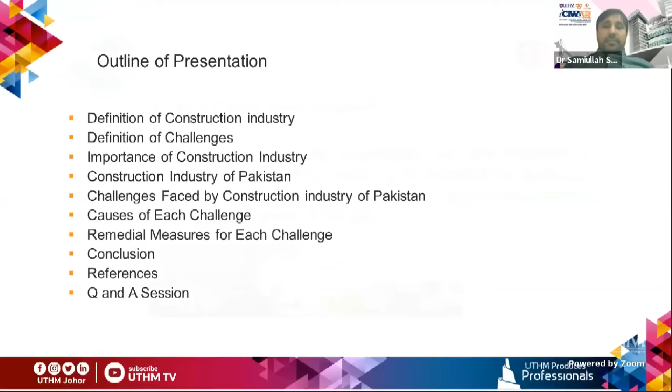Before introducing the construction industry: this industry engages so many people in construction, alteration, decoration, or demolishing of structures, roads, sewers, dams, bridges, pipelines, tunnels, canals, and other work sites. This industry is very famous throughout the world. It is not a new thing; people know about the construction industry. Actually, the background of this industry is very famous.

In the early days, people were living in caves and in different places. Slowly, with the passage of time, steps increased in the construction sector. People came from the caves to small houses, and there were no roads, no structures where they could live. With the passage of time, different technologies.

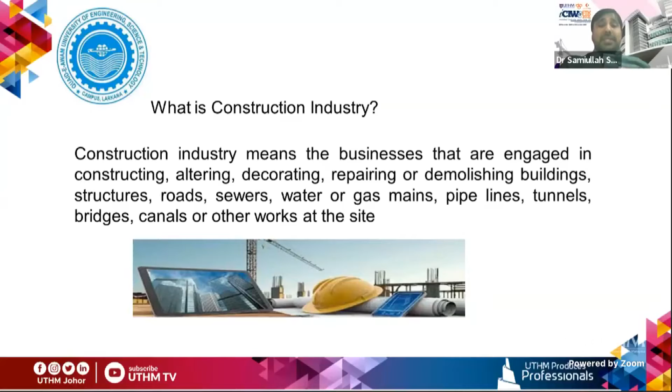But as Dr. Amizah already told you, due to the pandemic and COVID, so many opportunities in this sector were reduced. And labor especially is very much affected. They became jobless. So this is also a big issue. So Alhamdulillah, now the pandemic is going to be finished, inshallah, as well as in Pakistan. Nowadays, cases are very much reduced. I am also reading the news about Malaysia and other countries as well as Indonesia, Thailand, China. As the cases are reducing, the number of opportunities in this sector are increasing, because we are very much related and interacted with this industry.

Actually, what is a challenge? Everybody in life has different challenges. So this industry also has the problem of challenges. What kind of challenges? First, we have to understand. As the topic is related to challenges, we have to understand the definition of challenges as something that is by nature having its own explanation, some justification, or having some difficulty to understand, and which makes us in trouble, or which makes us struggle to overcome the challenges.

So challenges in terms of the construction industry can be defined in very simple words: what kind of issues, what kind of problems, and what kind of things the construction industry is facing. So today's topic actually is about the challenges in the construction industry.

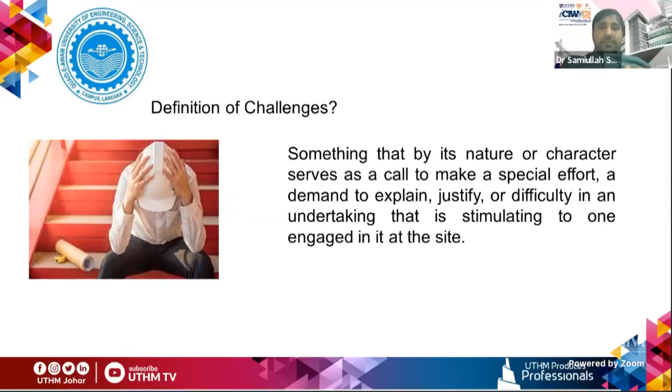Now, importance of the construction industry. The construction industry plays an important role in the uplifting of any country because as the construction industry increases, the economy and the GDP of the country will also increase. This industry is known as the most famous among all types of industries in terms of employment because there are so many participants, so many stakeholders engaged, as well as labor in terms of subcontractors, contractor, consultant, client, and some other labor which is sometimes unforeseen.

For example, if there is a steel fixer, a steel fixer has his own labor. If there is a concrete plant, they have their own labor, as well as if there is a small subcontractor, it has its own labor. So the number of opportunities is greater in this industry as compared to other industries.

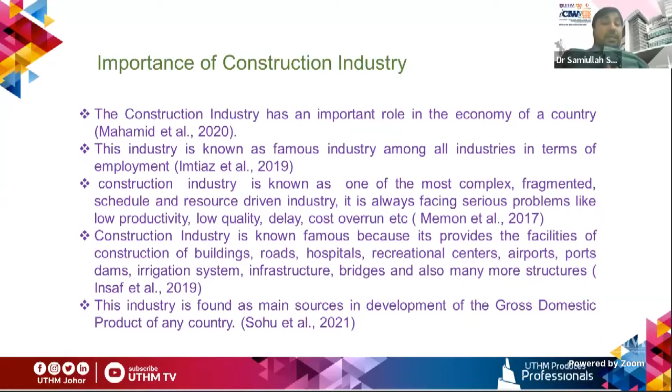Again, this is not only improving or increasing the GDP, gross domestic product of the country, but also improves the living standard. Living standard, how? When there is more construction activity or the country is more developed in that area, the living standard is better compared to developing countries. You know very well that there are two types of countries. One is developed countries, second is developing countries. The countries which are developed, how are they developed? In terms of one factor, that country has good structures.

According to Fringpong, this construction industry plays a role in giving new technologies and techniques day by day. Before, in previous days, what we observed is that construction of roads was done with the help of rollers, with the help of laborers. Nowadays, asphalt plants are there.

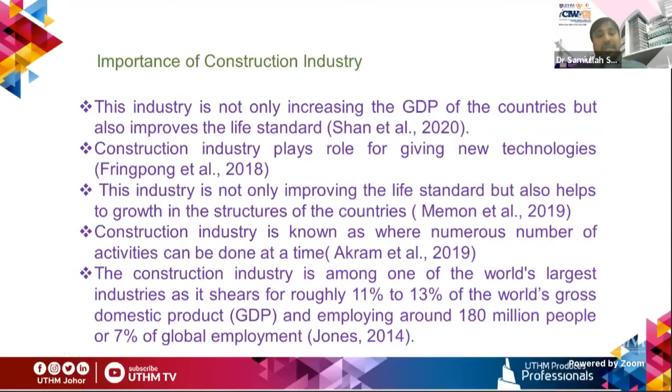11 to 13% of the GDP. And it clearly indicates 180 million people are engaged. It is not easy for other stakeholders to give this number of opportunities compared to other industries. This gives a better understanding to the stakeholders. Now, this statement is also important to understand.

According to a 2018 statement given by Jones and Comfort, this industry contributes 10 to 14% of total GDP, and around 190 million people are engaged. Now, this is actually in the USA. The construction industry of the United Kingdom contributed almost 103 billion in 2014-15.

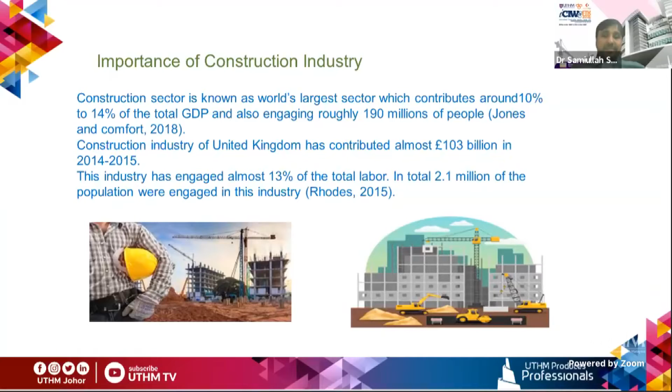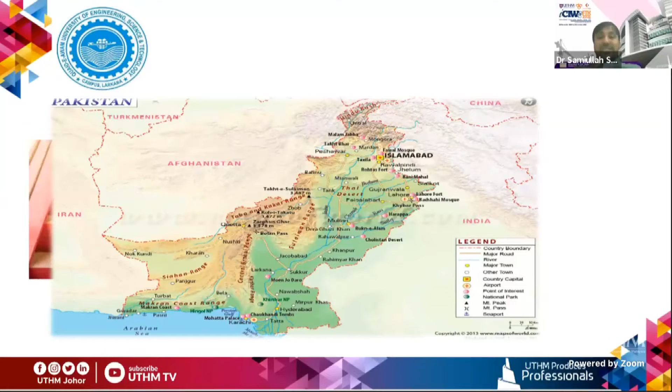Let's have some introduction about the construction industry of Pakistan. Maybe people have no knowledge about the construction industry of Pakistan, so here I am giving a brief introduction. The construction industry in Pakistan plays an important role in the economic growth of Pakistan. Recent provisional estimates published in the Economic Survey of Pakistan show the industry grew 9.1% in fiscal year 2017 and contributed 2.7% of the country's gross domestic product. I have the latest figure as well. This was 2017.

2018, 2019. In 2018, it also increased up to 9.3. In 2019, same 9.9. But in 2020, as I have already mentioned, due to the pandemic, it falls down to only 3.2.

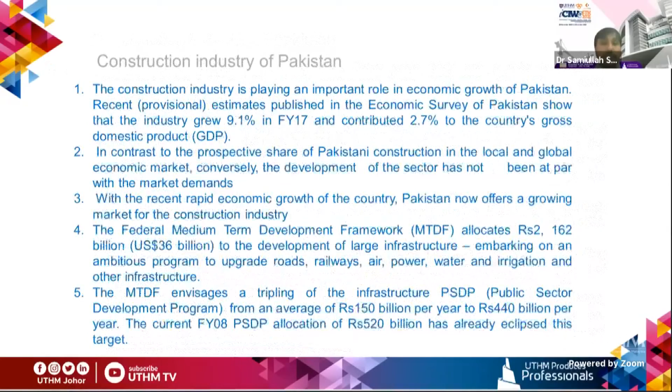Pakistan got independence on 14th August 1947. From Independence Day to about 1971, there were only a few private developers or contractors in Pakistan. Housing of the public sector was done only by the provincial and central works departments through small contractors, and they were not very competent and had no particular experience, although they had skilled labor, but they were actually unqualified.

After 1971, land was made available in the mega cities of Pakistan by different development authorities like HDA, CDA, KDA, LDA: Capital Development Authority, Karachi Development Authority, Lahore Development Authority, Hyderabad Development Authority. Larger allocations were made by the government of Pakistan to the House Building Finance Corporation. A number of entrepreneurs, industrialists, businessmen, importers, and consultants entered the construction industry.

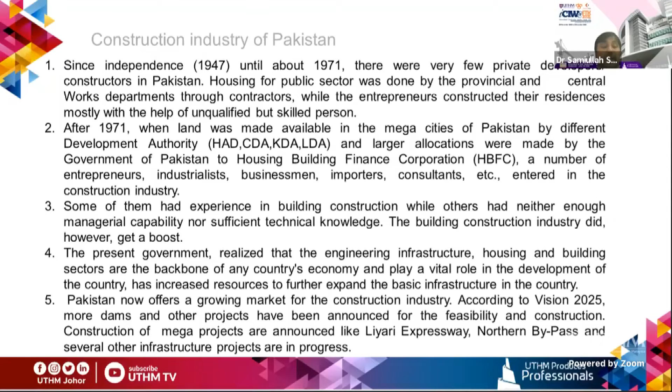According to Vision 2025, more dams and other projects have been announced for feasibility, and construction of mega projects like Lyari Expressway, Northern Bypass, Sukkur Hyderabad motorway, and other infrastructure projects are in process.

Now come to the CPEC. What actually is CPEC? For you, maybe this term is new. Actually, this is the China-Pakistan Economic Corridor. CPEC is actually a framework for regional connectivity. CPEC will not only benefit China and Pakistan, but also have a positive impact on Iran, Afghanistan, the Central Asian Republics, and the region.

The enhancement of geographical linkages, having improved road, rail, and air transportation systems with frequent and free exchanges of growth and people-to-people contact, enhancing understanding through academic and other opportunities, cultural and regional knowledge, cultural activity, a higher volume of flow of trade and business, producing and moving energy to have more optimal business, and enhancement of cooperation by a win-win model, will result in a well-connected, integrated region of shared destiny, harmony, and development.

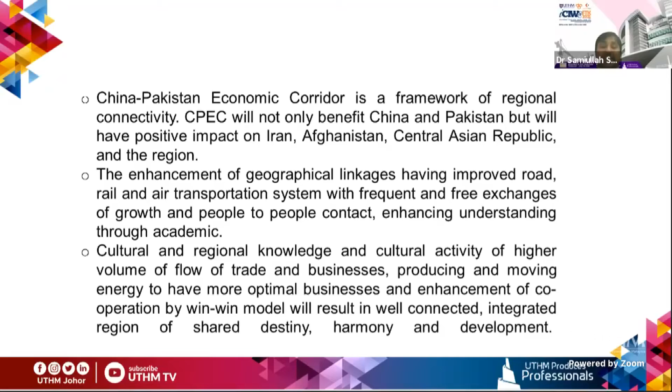The China-Pakistan Economic Corridor is a journey towards economic regionalization in the globalized world. It is founded on peace, development, and a win-win model for all. The China-Pakistan Economic Corridor is hope for a better region in the future with peace, development, and economic growth. CPEC is a collection of infrastructure projects that have been under construction throughout Pakistan since the beginning of 2013.

Originally valued at $47 billion, the value of CPEC projects is worth 62 billion dollars as of 2020. And nowadays, more investment is coming through CPEC into Pakistan. On 13 November 2016, CPEC became partially operational when Chinese cargo was transported overland to the Gwadar port for onward maritime shipment to Africa and West Asia, while some major power projects were commissioned by late 2017.

Actually, Pakistan has had two main issues since 2010. One was the power sector, the energy sector. So through CPEC, they have also invested into the power sector, and more projects have been constructed and more are under construction, which are giving opportunities.

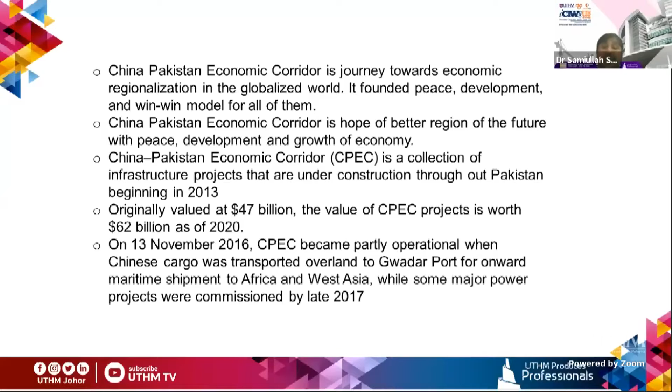And also, as I have already shown, this Gwadar port. I have already informed you on the map of Pakistan that we have two more famous operational ports. One is in Karachi, the second is in Balochistan, which is known as Gwadar Port, which is actually known as the heart of the ports of Asia.

Actually, during the visit of Chinese leader Xi Jinping to Pakistan in April 2015, he wrote in an op-ed stating, "This will be my first trip to Pakistan, but I feel as if I am going to visit the home of my own brother."

On 20th April 2015, Pakistan and China signed an agreement to commence the $46 billion agreement, which is roughly 20% of Pakistan's annual GDP, with approximately $28 billion worth of fast-tracked early harvest projects to be completed by the end of 2018. But due to some uncertainties, problems, challenges, or security reasons, a few projects are still not completed.

Transportation is the shifting of goods by truck, rail, road, and sea, and is an important indicator for economic development. There are two main parts. The first part represents vehicles, either vans, trucks, rails, airplanes, or ships, and the second part is transport infrastructure, such as roads, highways, seaways, airways, and railway tracks on which transport runs smoothly.

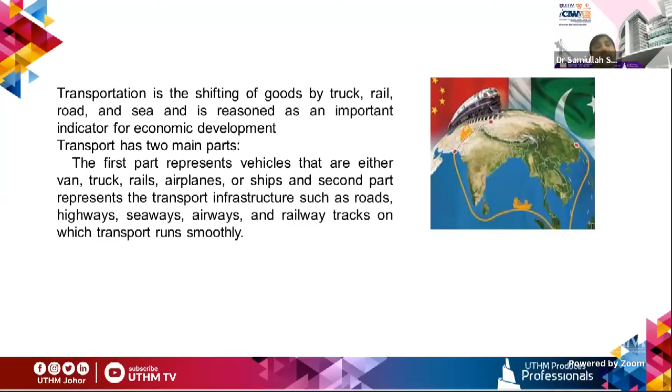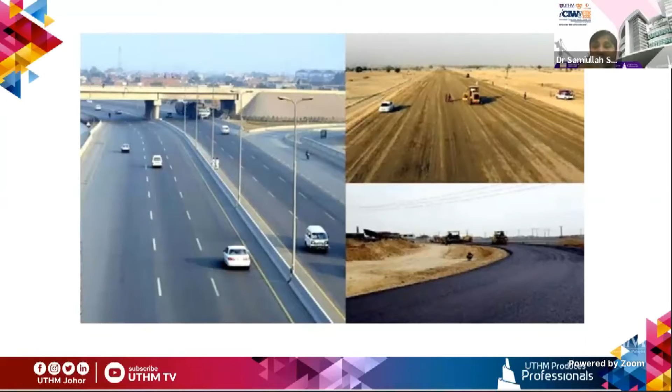At present, 2,790 kilometers of motorways are operational, while an additional 1,204 kilometers are under construction and a few are in the planning phase. Motorways are part of Pakistan's National Trade Corridor Project and the China-Pakistan Belt and Road Initiative.

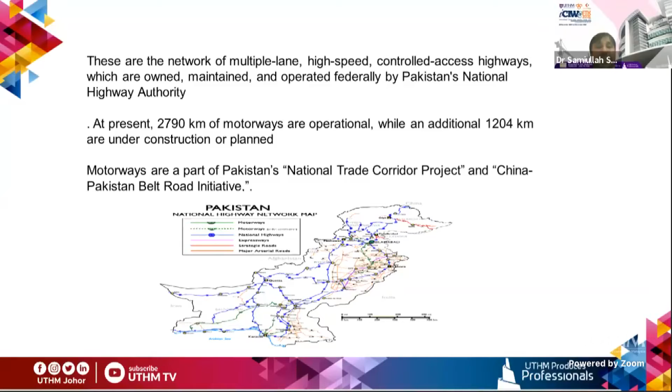Now, why are we going to discuss CPEC? Because the majority of the CPEC investment has been done in the construction sector. One of the projects, the highway project, was 120 kilometers in length, from Havelian to Thakot, located in Khyber Pakhtunkhwa province. And who is doing it? There can be questions whether it is monitored or supervised by the Chinese. No, it was under the Ministry of Communication, Government of Pakistan, the implementing agency is the National Highway Authority, and the proposing agency is the Ministry of Communication.

So the number of jobs for this one project alone is 5,500, and the estimated cost is $1,315 million. Now you can understand how many opportunities can be created by construction in the highway sector. This highway is a 4-lane motorway.

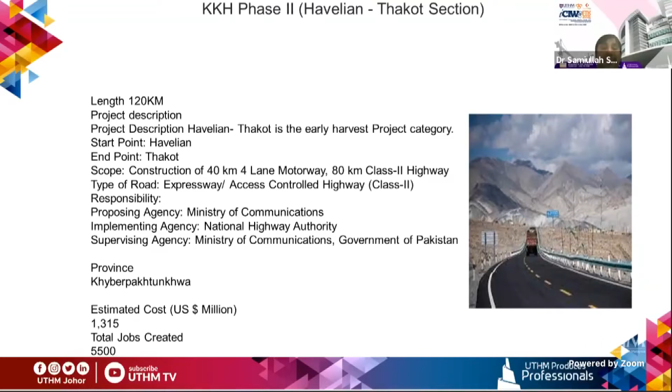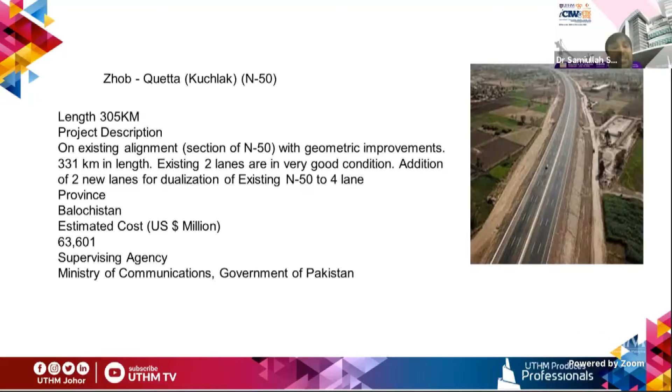And then the Zhob Kuchlak project. This project is also part of CPEC and has 2 lanes. It is located in Balochistan. The estimated cost is around 63,601 million US dollars. And this is also under the Ministry of Communication, Government of Pakistan. And the number of people engaged here is 3,250.

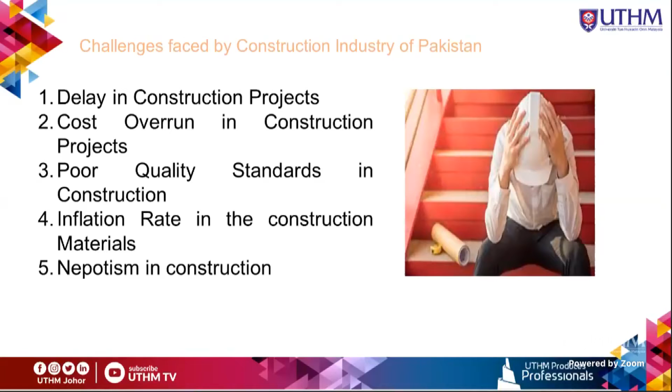Now, what are the challenges? What are the challenges faced by the construction industry of Pakistan? Actually, there are 5 challenges faced by the construction industry of Pakistan. Number 1, delay in construction projects, cost overrun in construction projects, poor quality standards in construction, inflation in construction materials, and nepotism in the construction sector. Although there are many other challenges, these are the major challenges faced by this industry.

Actually, before discussing what delay is, a few of the students have knowledge about delay, but here delay can be defined as when a project exceeds its original approved time period. For example, the project time period is 18 months, but sometimes it is completed in 3 years. That is known as a construction delay.

Construction sites throughout the world are facing this problem of delay. Still, this is not the end. Actually, the issue is not only in developing countries, it is throughout the world, including developed countries. This issue can prompt many adverse consequences, like disputes among proprietors and project workers. So, the list of delayed projects in Pakistan.

Number 1, motorway project from Sukkur to Hyderabad. It was scheduled to be completed, but now it's 2 years late. We don't know, it can be more, but it is delayed 2 years. Construction of Diamer Basha Dam, 2 years plus.

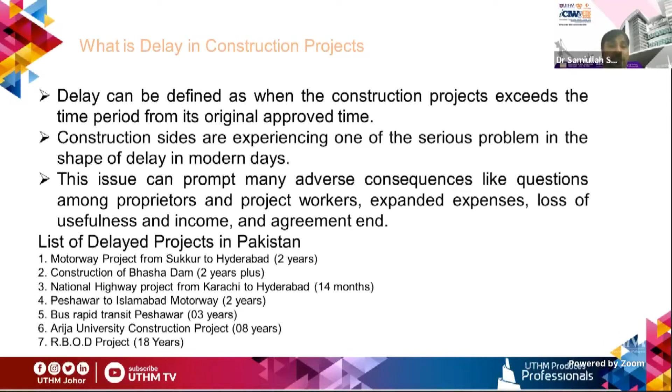Now come to what cost overrun actually is, as we have discussed the delay. It is when the total cost of the project exceeds the cost of the project which was estimated during tender time. Let's have an example. A project having a cost of $15 billion has been completed at $75 billion. The difference is known as the cost overrun. This cost overrun is found in all types of projects in Pakistan.

And this is more serious because Pakistan is having financial issues. Pakistan is a developing country, and sometimes in the construction industry, projects have faced cost overruns of more than 80% of the cost of the project, sometimes 90%, sometimes 100%. Pakistan is also facing critical project management issues, among which cost overrun is quite prominent. A number of construction projects have faced this cost overrun problem, which is directly or indirectly affecting the economy of Pakistan.

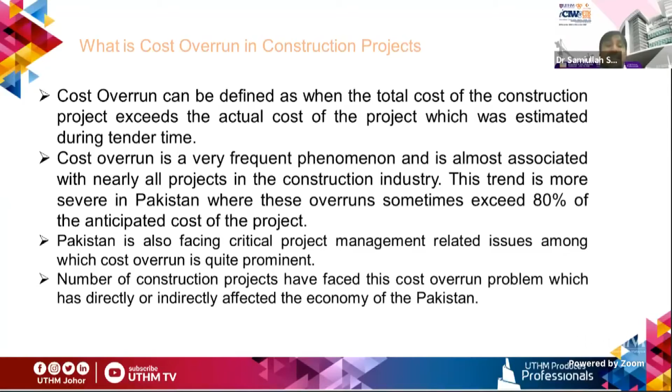What is poor quality? Quality standards. Quality standards are defined as documents that provide requirements, specifications, guidelines, and characteristics that can be used consistently to ensure materials, products, processes, and services are fit for their use. Unfortunately, in Pakistan, poor quality is also increasing day by day. Many projects have not been completed within the given specifications, standards, and guidelines, which has affected the life of the project as well as caused damage to human life.

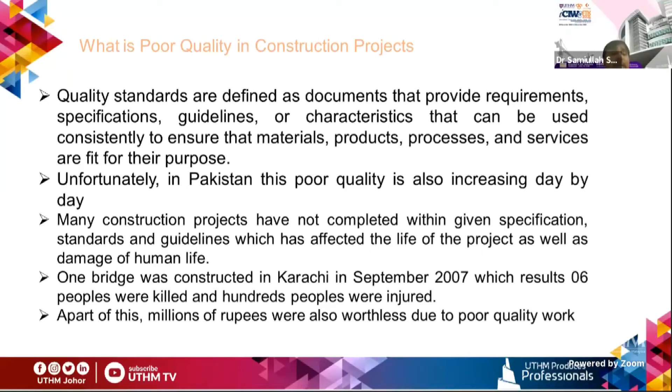One bridge, I'm only taking one example because there are so many. One bridge was constructed in Karachi in September 2005 and completed in September 2007, which resulted in 6 people killed and 100 people injured. Apart from this, millions of rupees were also wasted due to poor quality work.

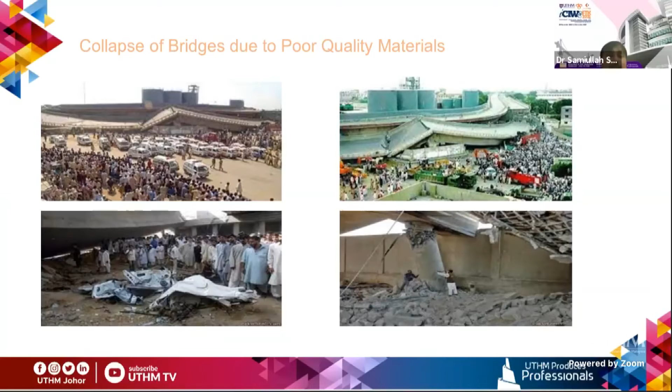Now, inflation rate in construction material. Inflation is causing an increase in the price of materials, machinery, and other inputs to construction projects. The annual inflation rate in Pakistan increased to 9.2% in October 2021, last month, from 9% in the previous month. It was the fastest inflation rate since last June, mainly driven by prices. As we are concerned with the national procurement procedures, rules, and the prepared CSRs, composite schedule rates, these are causing contractors to think 100 times before offering a bid on any project. The pace of construction work has been greatly affected by inflation in Pakistan.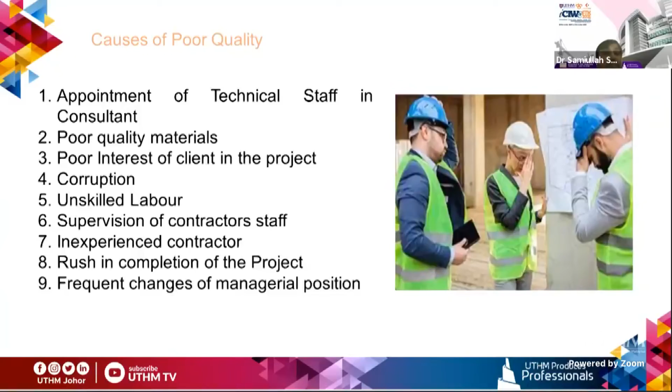Number 8, rush in completion of the project. Number 9, frequent changes of the managerial position of the project. These are the 9 causes of the poor quality. Now, we are going to discuss the causes of inflation.

Now here, causes of nepotism: political influence, lack of respect of law, no check and balance of the government or from client, personal interest of the top management, corruption.

Now, how to control these? How to control the delay? What are the recommendations, or suggestions, to control the delay? So, the number 1 factor or cause was delay in payment to contractor. Number 1, government should release funds to the contractor on time.

Number two, financially strong contractor should be appointed in the project. Number three, payment should be done on a regular basis. By implementing these suggestions, delay in payment to contractor cannot be stopped, but it can be reduced up to a certain level. This factor or this cause can be controlled up to a certain level.

Then poor time estimation. Client and consultant should make a proper estimation of the project, that they have to finalize what should be the time of the project, proper estimation with respect to the length of the project and what are the current dynamics of the project, proper visit at the site of the project.

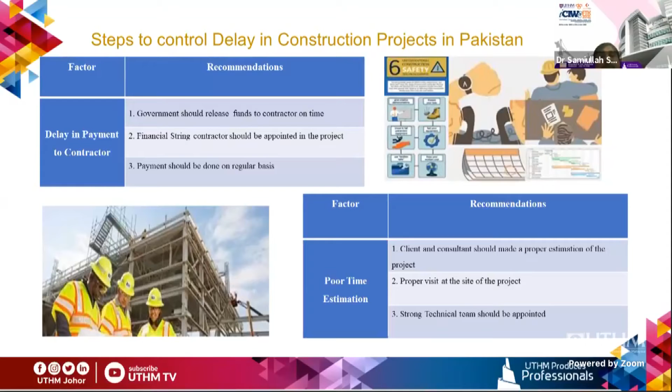Now, who gave these recommendations? These recommendations are from the stakeholders, from the participants of the construction industry. Shortage of funds from government: funds should be kept properly in the project. Actually, let's say the government is going to change or suddenly influence the government. The funds of one project are transferred to another project, or 75% or 50% cost of the project is transferred to another project, and definitely if there is shortage of funds from government, the project will be delayed.

The funds of the project should not be utilized in other projects. Means every project should have proper funding so that it can be utilized on time, so the project can be completed in the given time frame. And the political influence in terms of what? Let's say due to political approach, this project should not be completed because it was started by the opposite party, so they will try to influence. So political influence should be reduced.

Now, inexperienced contractor: well qualified and experienced contractor should be appointed. Selection of contractor should be on merit basis. No political influence should be done, because sometimes political approach is there. They try to influence the project and they try to appoint their own contractor or a new contractor which is not familiar with the project.

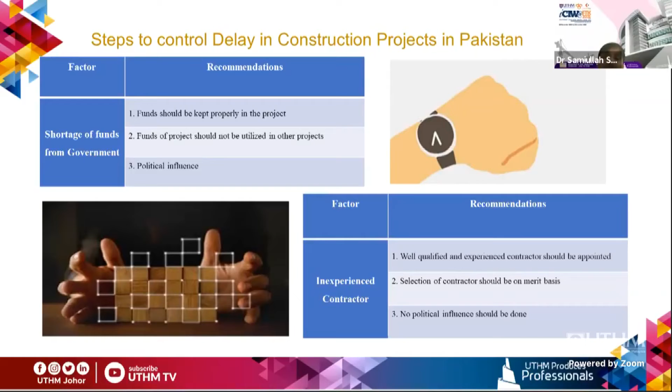Delay in approval of drawings and designs. Approvals of drawings and designs should be done immediately after getting amendment from the consultant or from the contractor.

And meeting, how to control? Then meetings should be frequently arranged, meetings with the three stakeholders, with client, consultant and contractor. They will play their role. They will meet frequently and discuss issues, and where the drawings and design have a query, they can resolve it by sitting with each other.

Proper communication should be done among client and consultant. Mostly the drawings and designs are approved by the consultant and then the client on suggestions of the contractor, sometimes consultant, or sometimes on the ground reality. If there will be proper communication, this cause can be overcome.

Poor coordination among parties. Frequent meetings should be done among all parties, all stakeholders. Current issues and upcoming issues should be discussed frequently. What are the current issues in the project? And upcoming issues should be briefed in the meeting, that these issues can come.

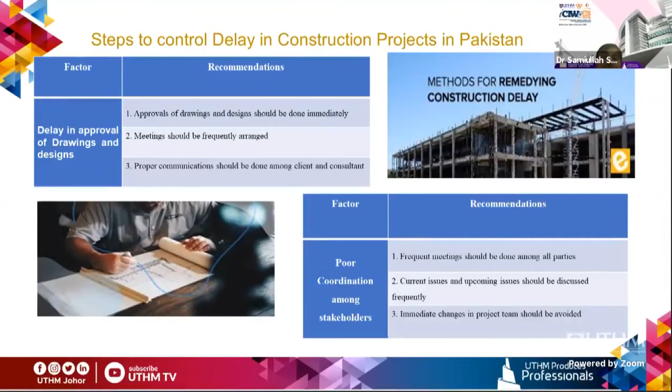Now, poor planning. Proper planning and scheduling should be done, scheduling and planning of the construction activities at the site. Competent staff should be appointed in the project. If there is competent staff, they will plan the construction activities at the site and how to complete the project on time. They have the skills, they have the experience to complete the project

or to take the work from the labor. Proper teamwork should be done. Yes, if there's teamwork, then this poor planning factor can be reduced up to a certain level.

Client interference in the project. Client interference should be avoided by conducting frequent meetings. How can the client interference be reduced? Because when you arrange meetings with the client, if there are some queries, or the impact of the interference can be briefed, then this factor can be reduced. Project activities should be shared among client and contractor. What is the current status of the project?

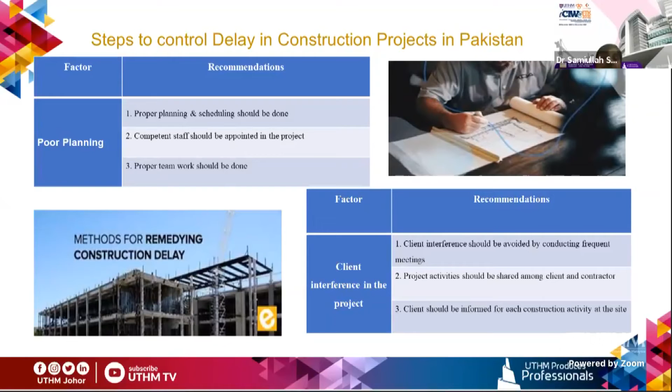The client should be informed of each construction activity at the site. Surely, the schedule should be shared with the client. The client should understand, okay, this construction activity is going on in that month. So with this, interference of the client can be reduced.

Unskilled labor. Unskilled labor is one of the factors. Skilled labor should be hired with good packages. Give them good wages. Provide them facilities. Training should be given to the labor about new techniques, because in the construction industry new techniques are coming day by day. So training should be given to the labor. Before starting the project, skilled labor should be arranged.

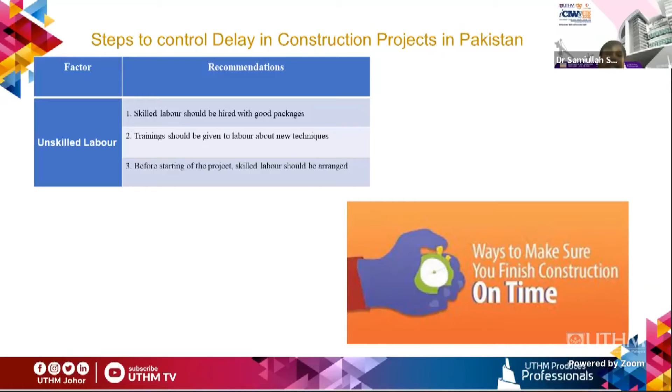So these were the recommendations to control the delay in construction projects in Pakistan. So now, number one, how to control the cost overrun. What steps should be taken to control the cost overrun?

Shortage of funds from the client. The recommendation is that proper funds should be kept for each project. If there are particular funds for each project, there will be no shortage of funds from the client. Political influence should be avoided.

This recommendation was also in the delay section, but here the political influence is like this: funds should be kept for each project, and political influence should not be involved, because if they are going to transfer the funds, definitely the cost of the project will increase. The client should arrange funds for projects before starting. Yes, this is the main point. The client should arrange funds before starting the project.

They must have an idea of when they have to complete the project and at what cost, so they have the resources.

And Doctor, inflation rate. Sorry for interrupting. Okay, all right. Excuse me, Doctor. Since we have a really detailed elaboration regarding the challenges of construction in Pakistan, we have a question from the floor. Can I read the question? One question for you. Yes, please.

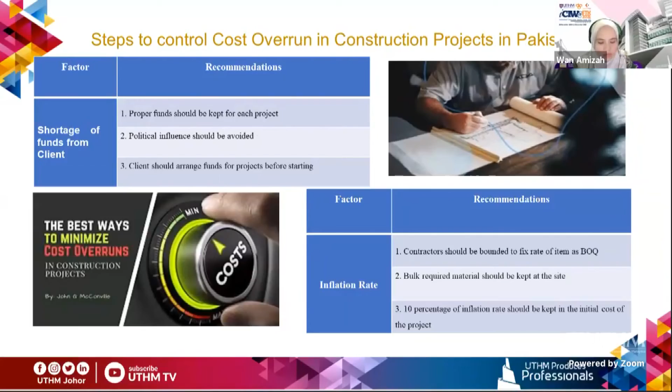You just highlighted the challenges faced by the construction industry in Pakistan, caused by delay in payment to the contractor, poor estimation, shortage of funds from the government, delay in approvals of the drawings, and some poor coordination. A slide after this, I think. Yes. Poor planning of work, client interference in the design, and also unskilled labor. These are quite general problems in other countries too, right?

Yes. They're asking what alternative solutions are used by industry players in Pakistan, especially authorities, developers and contractors, to overcome these challenges. In Malaysia, we are moving forward. We are exposed to BIM, building information modeling software. This is one of the applications related to construction, like Revit software covering structures, infrastructure, mechanical, electrical, and plumbing.

This actually tries to help our industry players make things smooth during the planning, construction, and completion stages. So can you share what alternative solutions are used by industry players in Pakistan to overcome these kinds of problems?

And one more, Doctor. I think we might have 30 minutes more for you, and then we can continue with the Q&A. I think we have a lot of questions for you after this. Okay, no problem. All right, Doctor. Okay, no problem. Thank you very much, good questions. I really appreciate it.

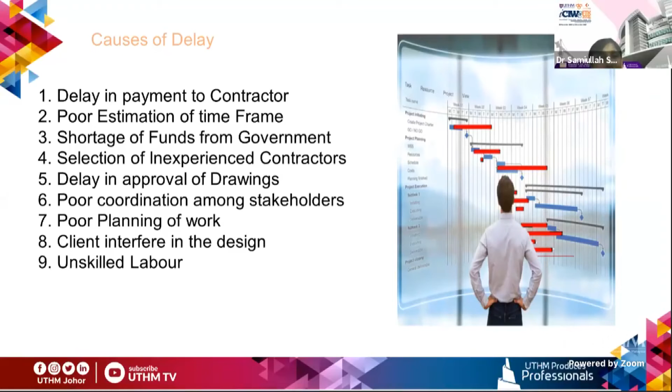But the problem is that these factors are directly affecting us. I have done the literature review on Malaysia; these factors are also there, but not to the same level. Pakistan is affected more than 3 times as much as Malaysia.

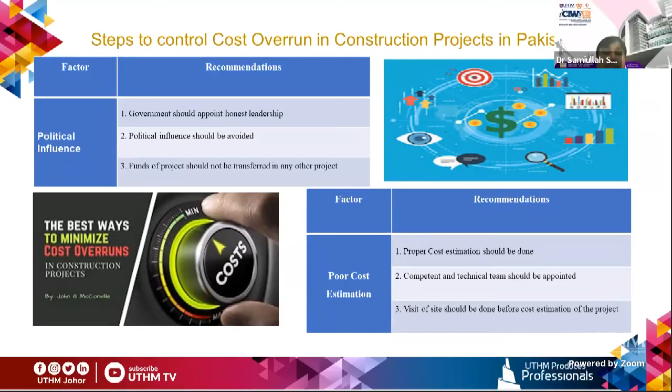So here is now political influence, a factor or cause of cost overrun. This factor may not be very familiar in Malaysia, maybe not considered top ranked, but in Pakistan it is also top ranked. So here honest leadership is required to control the political influence, and funds of a project should not be transferred from one project to another project. Poor cost estimation: proper estimation should be done. A competent and technical team should be appointed. These are the recommendations.

Change in the scope of the project. Yes, I have seen this factor in different countries as well as Malaysia, and I also read papers from Indonesia and Thailand. What was the reason? In Pakistan, the scope is changed because they don't know the scope initially in the feasibility report, but after studies of the project they come to know, oh yes, we have to change the scope. The proper scope of the project should be designed at the initial stage. These are the recommendations given by the stakeholders from the contractor, consultant, and client. These are also available in the literature review. I have ranked them number 1, 2, 3 according to frequency level.

Complex design of project. Simple project design should be available at the site. If you are working as a civil engineer or project engineer and there is a complex design, surely you will discuss with the boss, and the boss will discuss with the consultant, and this takes time. If today's construction activity is delayed by 2 days, definitely the project cost is affected, as they are interrelated. A competent team should be appointed in the consultant, because a competent team can make the design easy to understand. Before finalizing the design, contractor and consultant should discuss with the client.

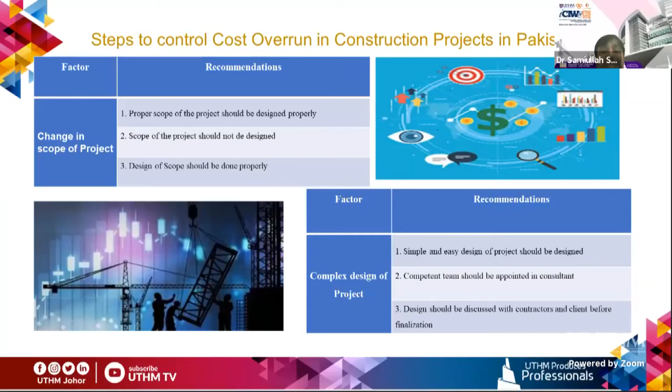Now, inexperienced subcontractors. This factor is found in Malaysia as number 17. I have read different authors; recently, Memon also completed a study on cost overrun in peninsular Malaysia. Subcontractor competence is an issue in Pakistan because contractors sublet the project to another contractor. They take the project, but they don't know how to complete it. They don't know the profile of the subcontractor, and they give the project to the subcontractor. The client should assure a new policy; this third one is a new recommendation. The client should give new policies before the selection of the subcontractor and evaluate the subcontractor's performance. Not like this, where the assigned contractor gives the project to anyone he wants.

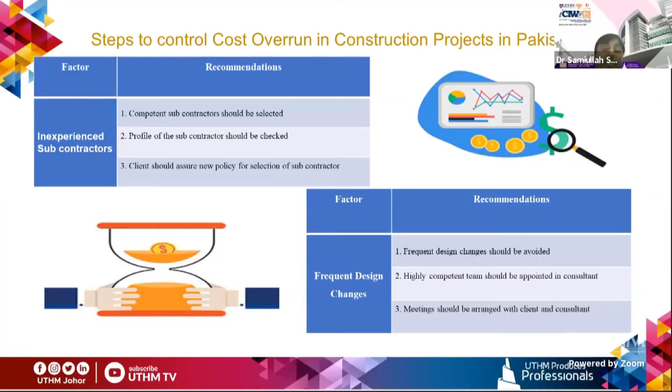Frequent design changes. Yes, frequent changes in design should be avoided. A competent team should be appointed to the consultant because the designs are made by the consultant. Meetings should be held with the client and the consultant. Appointment of technical staff in the consultant: this was a serious issue in Pakistan. We have technical staff in the consultant, but not up to a certain level. Competent staff with a high profile should be appointed. The consultant should have technical staff on merit. Sometimes the client requests the consultant to hire an engineer who doesn't have consultant experience, so how can they supervise the work?

Poor quality materials. Material engineers should be appointed. Quality of material should be checked by consultant and client staff regularly. A penalty should be imposed on contractors for using poor quality materials. Now we are discussing poor quality standards.

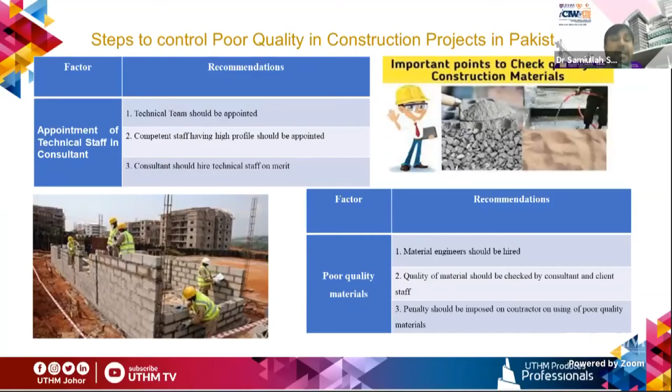Poor interest of client in the project. This factor is new, not new in Pakistan, but new in that it has popped up to the top of the factors, because sometimes the client doesn't take interest in the project since a number of projects are going on, and they ignore its importance. So how to control it? The client should visit the construction site and take full interest in each project. Say a project has a small amount; the amount is there, but they ignore the project and prioritize the mega projects. Surprise visits by clients and consultants should be done at the site. Corruption.

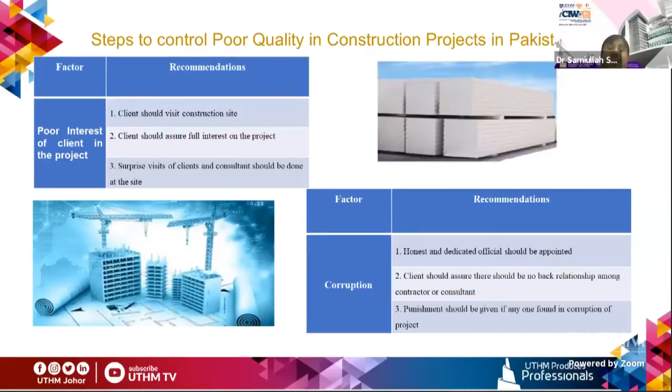Honest and dedicated officials should be appointed. The client should assure that there is no back relationship among the contractors or consultant. If there is such a relationship, then I think there will be corruption. Punishment should be given if anyone is found in corruption on the project.

Shortage of skill level: same factors and the recommendations. Number two, a competent engineer should be appointed who can monitor labor. If the labor is not very skilled, then the competent engineer can monitor them until the final appointment of skilled labor. Supervision of contractor staff.

Regarding supervision, contractors don't have competent staff, or they appoint fresh engineers. They don't know about the drawings. They don't know about the quality. They don't know anything. To save cost, to save money, they use low quality material, but the contractor staff, the engineers, don't know.

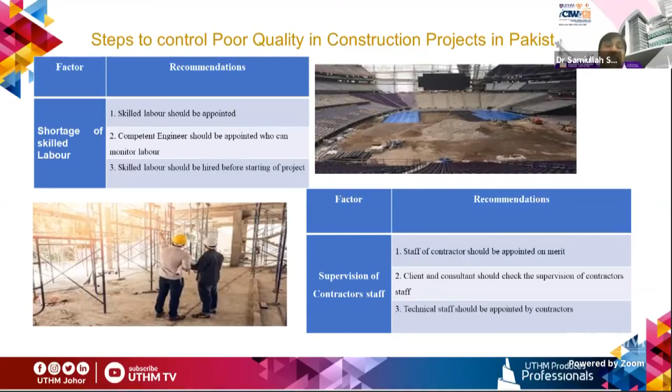Staff of the contractor should be appointed on merit, and frequent visits of the client and consultant should be done. Technical staff should be appointed by contractors. Inexperienced contractor: highly qualified contractors should be appointed. Political influence should be avoided. Contractor performance should be checked on a regular basis.

As I have told you, sometimes the project is given to a contractor having a good profile, having experience of highways, but they don't have experience of buildings. They don't have experience of drainage. They don't have experience of pipelines. They don't have experience of construction of dams. And this factor is also new as compared to Malaysia and other countries.

Rushing completion of the projects. Now the contractor has a number of projects going on. So what they do is race to complete the project, completing it with poor quality construction.

Each construction activity should be checked. How? Let's say curing is required for the foundation, but they say, okay, go on. They have to keep curing for a minimum of 7 days, but after 3 days they start other activities. Performance of the contractor should be checked. The number of ongoing projects of each contractor should be checked and monitored.

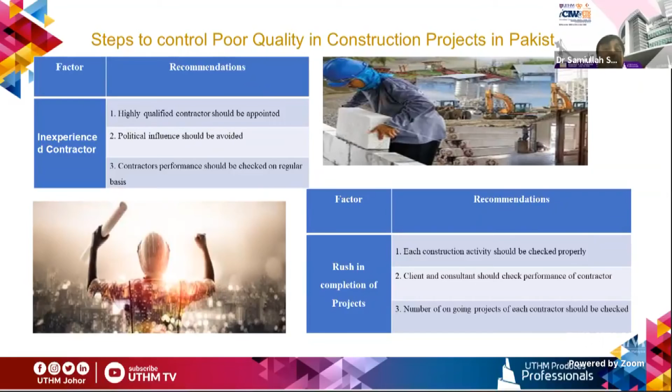Frequent changes of managerial positions. Yes, sometimes transfer or posting of managerial staff also creates problems of poor quality, because if new staff is coming and he reads the drawings, it takes time. So this should be stopped. Additional charges: let's say a deputy director is assigned as project director. So for that, regular managerial staff should be appointed.

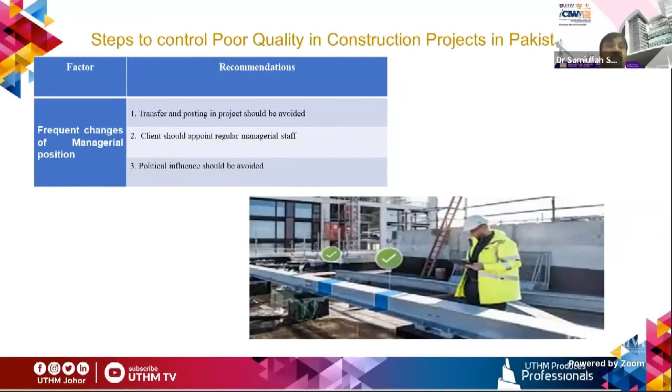Now, inflation. International investment is actually a big issue in Pakistan. Because of security issues, international investment is coming in very low. Proper security should be provided to investors. Investors should be invited and encouraged in mega projects, and security should be ensured in the country. Performance of the government: uniform policies should be there, and trust of the people in government policies. Government should take actions for the betterment of the nation.

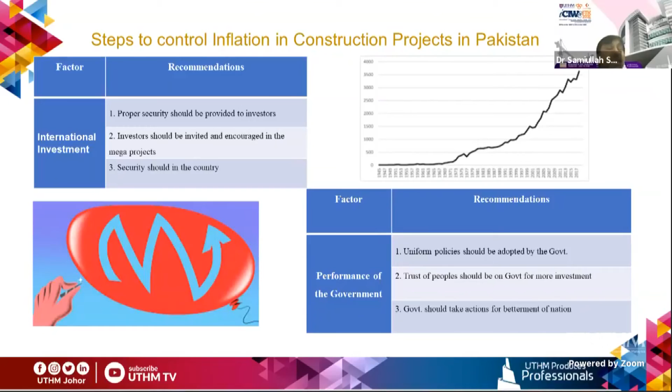Export and import performance: exports should be increased. Maximum efforts should be made for export. Export-import balance should be checked regularly. Loans from banks by government: unnecessary loans from banks should be avoided. Loans should be taken up to certain limits. Value of currency should be kept stable. This is one of the serious issues, because inflation comes because of loans and shortage of exports.

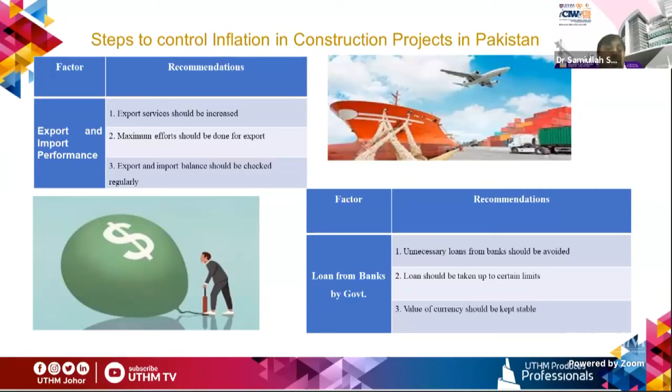Then security issues. Security issues should be resolved on a priority basis. International conferences should be arranged on these issues. The current security of the country should be briefed to investors, because in the past, if you observe, Pakistan was affected by security issues, bomb blasts. So foreign investors were leaving Pakistan. Now security is much better. So conferences should be arranged so they know what steps we have taken.

Impact of international market: currency should be kept stable. If the currency is stable, then the impact of the international market will not be too much. Nowadays our currency is going down because of inflation, and we are facing inflation in construction projects. The rate of cement has increased, steel has increased, fuel has increased. Government should adopt policies so the international market does not affect this industry. They can give subsidies.

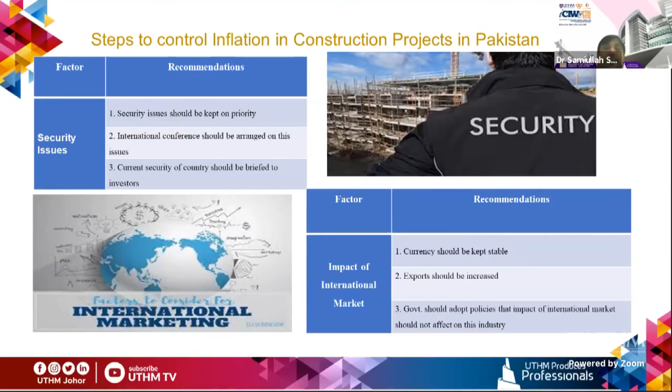Now, nepotism and political influence. Nepotism is one of the problems in Pakistan.

Political influence should be avoided to control the nepotism in the construction projects. Government should adopt policies in selection of contracts or providing contractors on the merit basis. Lack of respect of law. This is a problem. Maybe the participants who are listening have this new thing in the construction industry, so they can also understand what measures should be taken.

Rule of punishment should be adopted by the government. Each contractor and consultant should be treated equally. It is not like this: okay, this contractor is rich and influential, so there will be no rules and he is treated very well. Because law for all the stakeholders should be the same.

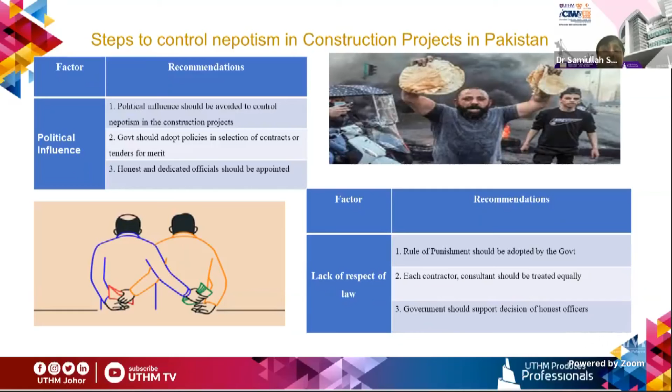Government should support decisions of the honest officers. Yes, we have honest officers. Government knows. So whatever decisions they are taking, the government should support the decisions of the officials. No check and balance by the government. Performance of each contractor and consultant should be checked on a regular basis.

Now, on this, I want to brief one thing: if you search on our website, Pakistan Engineering Council, you can see that a number of companies are registered, but the problem is that you can still find the profiles of a few companies are not updated in the system. Strict policies should be adopted for all stakeholders, and quality standards of each project should be checked by the government.

Personal interest of the top management. Yes, this is a new factor. If a person having a key position has some personal interest, let's say they have awarded the project to his own contractor. Okay, the contractor can give some money, or some relief, or appointment of labor, appointment in managerial positions can be done. So in this, highly qualified and competent staff should be hired. Policies should be kept uniform for all stakeholders.

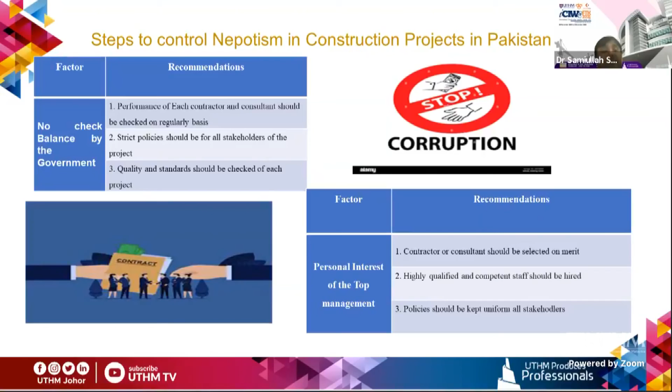The number 1 solution is, delay is mainly the problem of the payment to the contractor. If the payment is done on time, surely the delay of projects, not all projects, but up to a certain level, can be reduced. Cost overrun, cause number 1, can be reduced up to 60%. Quality standards can be improved by more than 60%.

Now, inflation is highest, more than 70%. By implementing these recommendations or suggestions, the inflation rate can be reduced, because the international investors are not available in Pakistan. A few years ago they were in thousands, now in hundreds. If we improve the security issues, the inflation rate can be reduced in Pakistan. Nepotism is also one of the big challenges faced by this industry, and this can be controlled up to 60%.

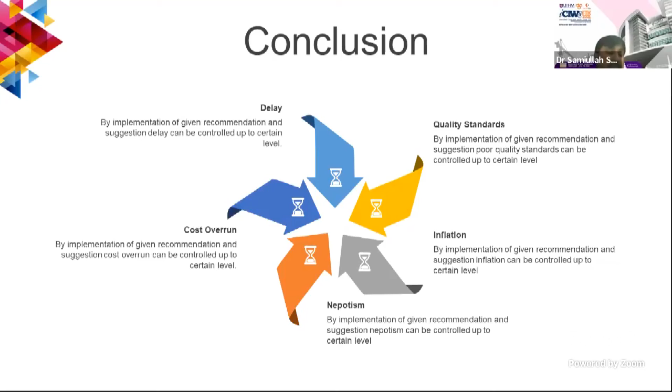Okay, Doctor, thank you very much, Associate Professor Engineer Dr. Samiullah, for addressing this interesting topic. Now we have good exposure regarding the construction industry of Pakistan related to the China-Pakistan Economic Corridor, right? And you listed the challenges faced by the construction industry of Pakistan. Maybe, roughly, cost overrun. The big problem you want to highlight is also related to the funding, right?

Okay. Yes. Now, okay, Doctor, we have a question from the floor. I think this first question might be related with the funding also. Maybe I can read from here for you. Yes, sure. Okay, so the first question is from Tuan Syed Muhammad Farid, this one from an industry player.

He is asking: in Malaysia, one method used to construct big projects such as highway construction, to control problems related with construction quality, was to implement a privatization policy in the highway industry, in which the private sector constructs highways with their own fund and also collects toll fares after the completion of the construction.